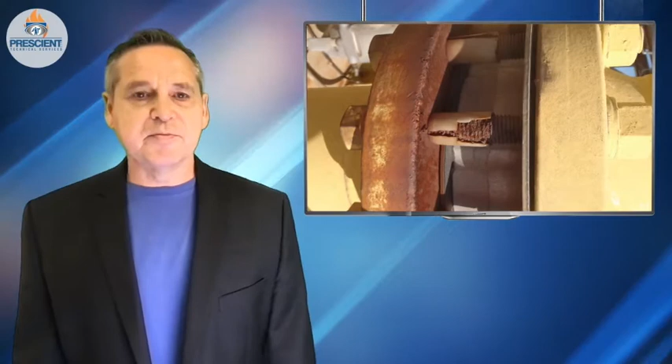I'm here today with another episode to bring you important safety insights into the world of fuels and combustion systems. Today's episode is all about performing a gas piping system audit at your facility. There are some very obvious things to look for when evaluating the safety of gas piping systems, and then some things that are very obscure and not so obvious. I'm going to take you into both worlds.

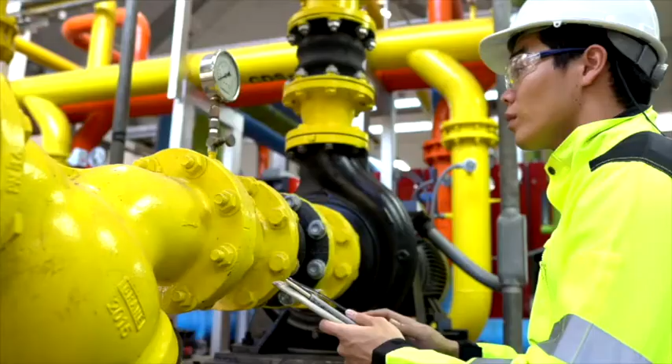So one of the things you want to do is you want to start where the gas piping comes into the facility. Now, if you haven't seen Module 12 yet about isolation valves, you need to watch that because that's an important part of this. And I'm not going to again cover looking at isolation valves. Instead, I want to cover some things like corrosion protection systems.

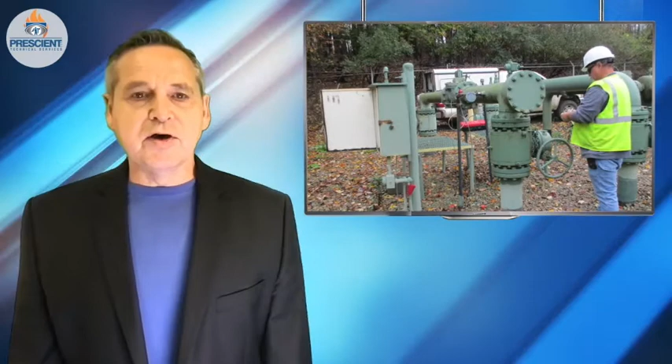Did you know that every utility is mandated by law to provide periodic corrosion inspections of the underground systems that serve your facility? This needs to be documented, and you have the right to ask about the condition of your gas piping that serves your facility.

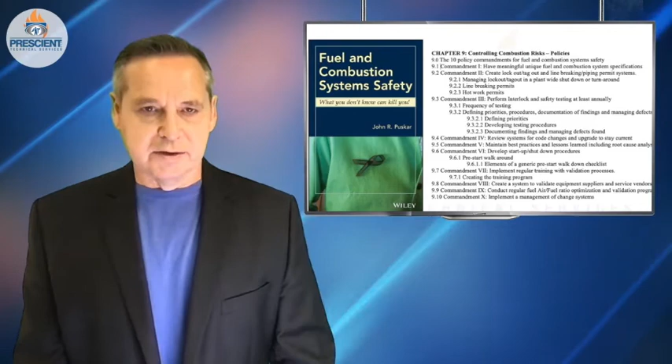In my book, Fuel and Combustion Systems Safety, What You Don't Know Can Kill You, I talk about a situation where I happened to be at a large auto plant, and there were smells of gas reported in the parking lot. There was a 400-foot line that went under the parking lot. It terminated in a gas pressure reducing little blockhouse close to the main manufacturing plant. Folks could never understand why there was a gas smell in certain parts of the parking lot.

It ended up that that line happened to be like Swiss cheese. They reported this, the utility came in during a 2-week summer shutdown, and they started to dig that line and check it physically. It ended up being something that extended the shutdown another entire week because they could not get gas onto the facility till the entire line was repaired. And again, this was all on the gas utility.

You don't need this kind of surprise if you're some type of manufacturing facility, maybe a hospital, someone who has critical occupancies. So lesson number 1 is ask the utility for these records, be a partner with them in understanding the condition of those lines.

Now here's another issue. Where those lines come above ground, the utility seeks to isolate themselves from your piping system. So there will typically be isolation washers, bushings, gaskets between flanges, because they don't want to be impacted by whatever you're doing with the piping.

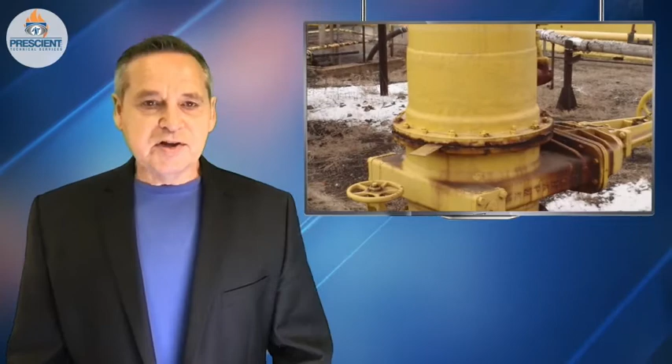Oftentimes when gas piping from a utility extends above ground, goes to a metering station, it ducks back down underground and is distributed through a large site. This site of yours may not have cathodic protection on those gas piping systems. Or if so, you may have no idea what the condition of those cathodic protection systems is.

You'll need to get a hold of a corrosion protection engineer or someone who provides these services to come evaluate what the condition is of your underground piping and your cathodic protection system. Again, you can get that from the utility, but you might be the biggest offender there. And you don't want to be surprised by that type of a thing.

I've been to facilities where there's horrible smells of gas out in the middle of nowhere, walking along a wooded area, and you see a puddle on the ground and there's bubbles coming up through it that are actually natural gas leaking from an underground line. You don't want this condition because it's an extensive purge and repair, and you'll be down for a while. The other thing you'd want to do is you want to look at exterior corrosion protection.

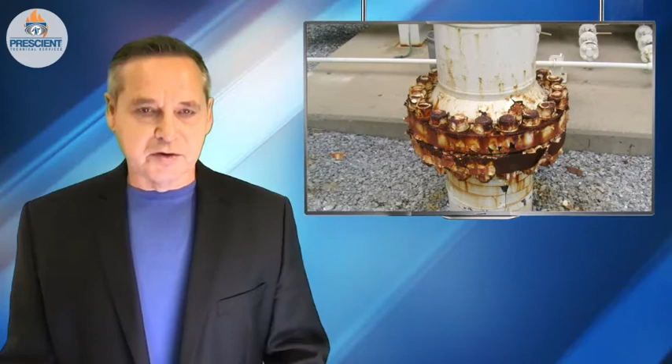What's the condition of paints and coatings that are on some of the piping systems? What's the condition of fasteners? You want to get yourself a paint thickness gauge. They're relatively inexpensive. You lose thousandths of coatings annually just due to oxidation in the atmosphere.

Paint on piping systems is not necessarily there to make them pretty. It's there as part of an exterior corrosion protection system, which you must protect and maintain. Other things you want to look at: Are gas lines labeled? Maybe labeled according to the pressures that they're at. Are hangers in place? Are you walking the line looking to see that hangers are actually making contact, that they exist where they're supposed to?

I've worked with many companies through the years to develop proprietary checklists, especially those in the power industry, so that they can do consistent, comprehensive audits of their gas piping systems. If you're not doing this, if it's not even part of your radar screen, you're in for a surprise, and it won't be a good surprise.

I'm going to share with you some information from the Prescient Technical Services module regarding piping system failures and corrosion protection systems. It'll give you a little bit of an insight into some of the things I'm talking about. And at the end of the day, the life that you save, it just might be yours.

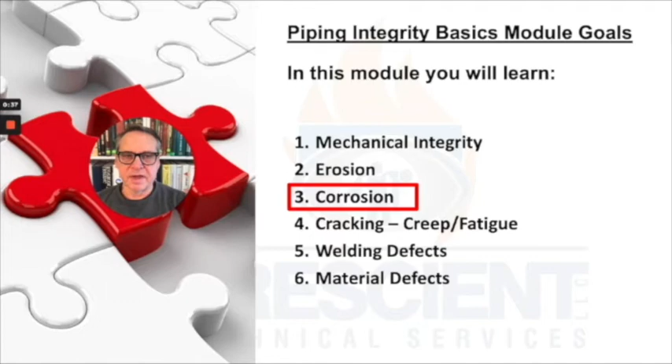So we're next going to cover corrosion. Corrosion is the broadest and most complex failure mode that's presented in this module. It's the largest section, and there's a lot to absorb here. So what is corrosion? Well, a good source for you to have an in-depth understanding about corrosion past this module is the National Association of Corrosion Engineers.

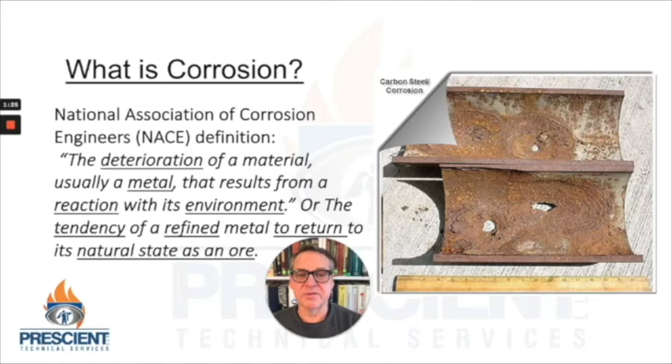They define corrosion as the deterioration of a material, usually a metal, that results from a reaction with its environment, or the tendency of a refined metal to return to its natural state as an ore. And we'll look at both of these phenomena. So steel, for example, doesn't want to be steel. Out in nature, it wants to return to iron ore.

If you don't know much about it, steel's made by two processes. One is in mini mills where we reheat scrap and add additives. The other is the primary method where we take iron ore pellets, make them into iron, and then refine that iron into steel by removing some of its carbon content. So ultimately, steel is iron. It wants to return to that most basic form, and it wants to blend back into the ground.

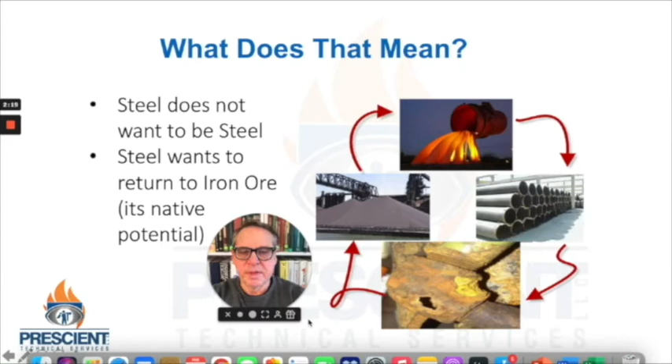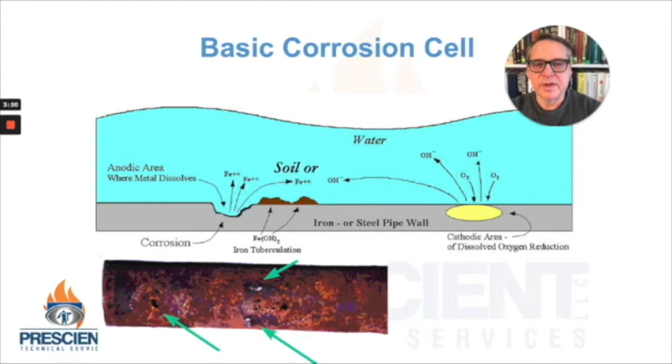A lot of corrosion occurs with what we call corrosion cells. This is a basic corrosion cell. I'm showing you an iron or steel pipe wall that's submerged in water or soil. This is showing a cathodic area and an anodic area. There are different charges on molecules here. They're being attracted away from the base metal. They're coming out of solution with the metal, and they're moving back to pure iron.

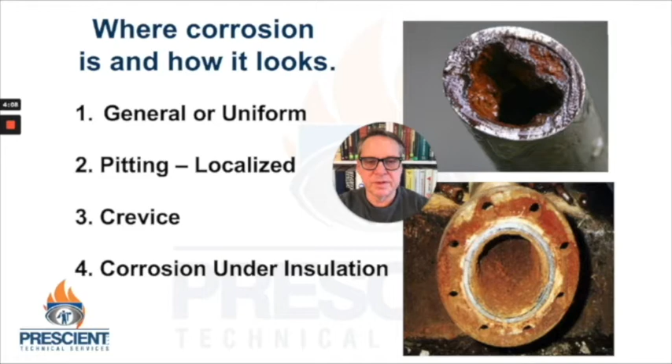Here's just 4 of the many ways that you could describe corrosion. There's general or uniform corrosion, pitting or localized corrosion, crevice corrosion, and corrosion under insulation. I'm going to provide what I believe are some interesting technical papers about how some of these have caused major problems in refinery explosions and other types of major industries.

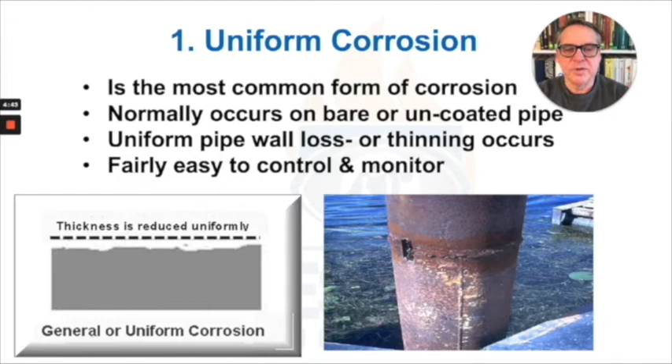Uniform corrosion is the most common form of corrosion. It normally occurs on bare or uncoated pipe, and you can see here in the picture underneath mine that this pipe that's sitting mostly submerged for long periods of time has lost a somewhat uniform amount of wall thickness.

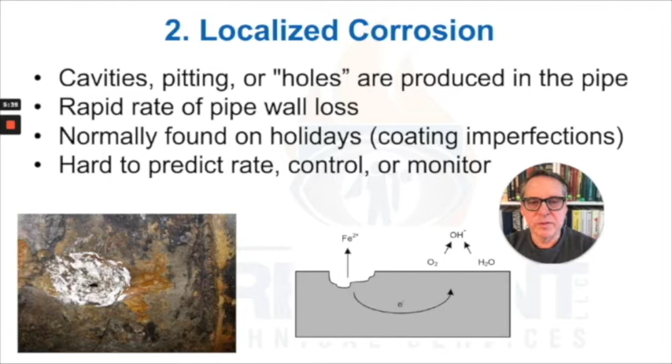Localized corrosion is where there's cavities, pitting, or holes produced on pipe or some metal wall. There's a rapid rate of pipe wall loss. In the corrosion industry, on piping systems, where there's an imperfection in the coating that's applied as corrosion protection, they call that imperfection or that missing area of coating a holiday. It's hard to predict the rate of localized corrosion and to control it or even to monitor it.

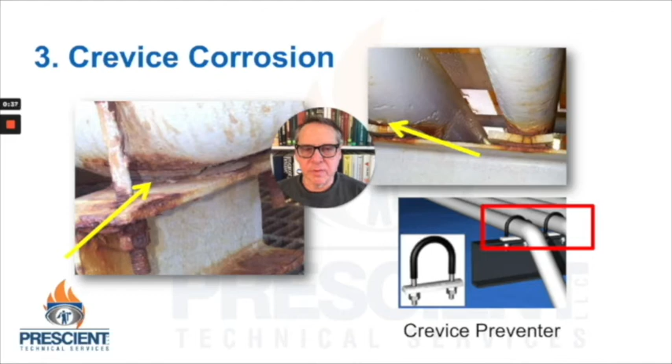Another popular type of corrosion is called crevice corrosion. You could see it here in a number of piping applications where pipe is supported touching pipe slides underneath pipe racks where we just have this small amount of contact area where there isn't a lot of air movement. One of the papers that I'm presenting to you identifies this as one of the leading causes for a horrible catastrophe.

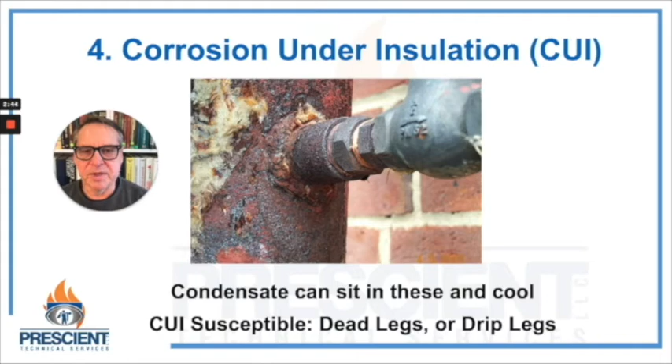Quite often, if piping systems have dead legs where there's condensate, for example, that's allowed to cool, or where there's water spray and piping doesn't have the ability to dry and the insulation soaks it up and keeps the surface of the pipe wet, there could be great potential for corrosion under insulation to occur. Some areas where this is most likely are where there's intermittent operation, again where the insulation or jacketing has been damaged, and where the insulation's been wet or can absorb water.

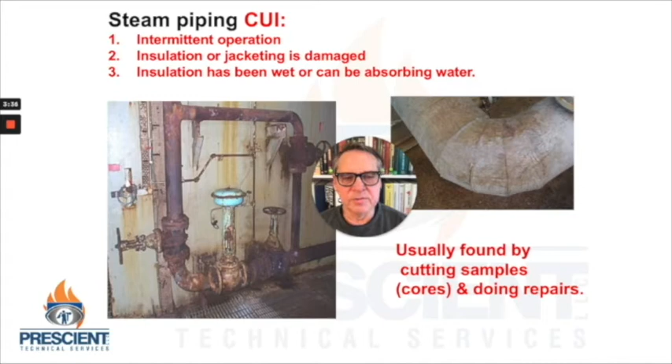I'm showing you a system there on the left where the insulation's been removed, and you could see that there's been substantial corrosion for years. And like I said, it would require the periodic removal of samples or cores to identify it. So areas that are most susceptible to corrosion under insulation also include pipes operating continually at between 25 and 250 degrees, or they're operating above 250 degrees but intermittently.

Piping systems that vibrate a lot because the insulation gets damaged, piping systems that have damaged wrappings, and near steam vents or humid areas, or where, for example, there's mist from cooling towers that occasionally blows their way, or there have been known piping leaks. Acid vapors can also be a contributor to corrosion under insulation. You could condense acid vapors through insulation onto the pipe and keep them locked there.